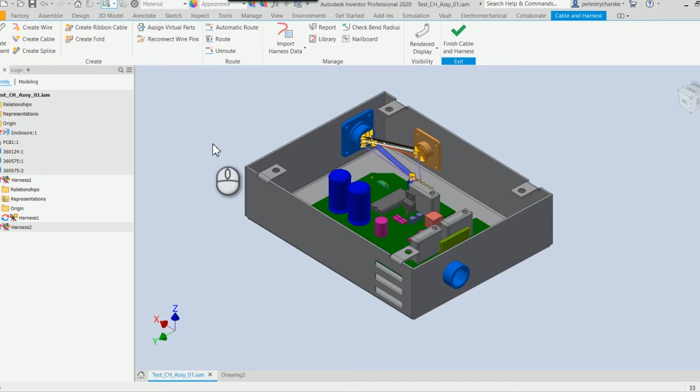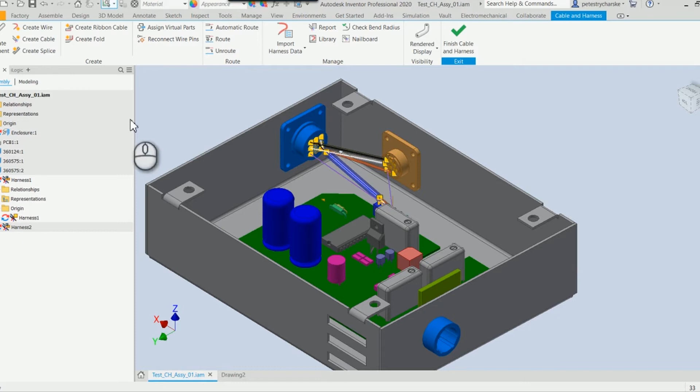But in some of the commentary to that video, a person said, that's awesome, but there's no way to change the color. It's always going to be blue for the segment. And I have good news. It is possible to change it. Part of that requires having different styles that you can choose from your wire library. So I've already activated a harness I had for a different video and created a segment. So here's that beautiful blue segment that everybody is used to seeing and the other person talked about.

But what we can do is, inside the library, we can look at different categories. So this is where you would normally create your own wires. I've created some of my own wires, or I've created my own cable, just some standard 14-2 cable. But you can also create what are called looms, and the looms are the harness itself. So there's the default library loom, that's the one that you normally see. Then if you look at the sample, you've got some other types that you can use. And then I've started building up my own.

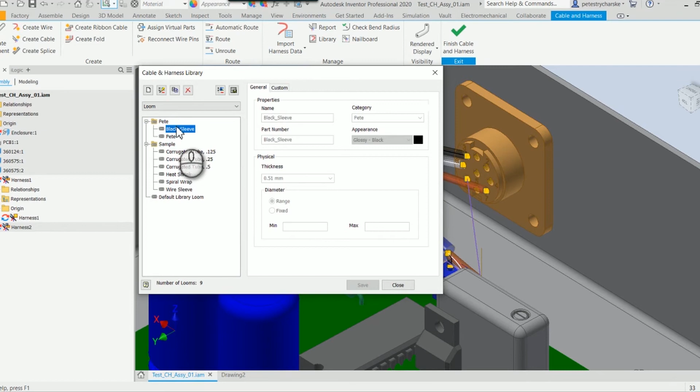So I've got one that looks like stainless. Looks like I've switched that, that's not available. But the black sleeve is one, so I'll have to adjust the material library to get my other stainless thing back. But here's our black sleeve, and you can see I've put it as glossy black.

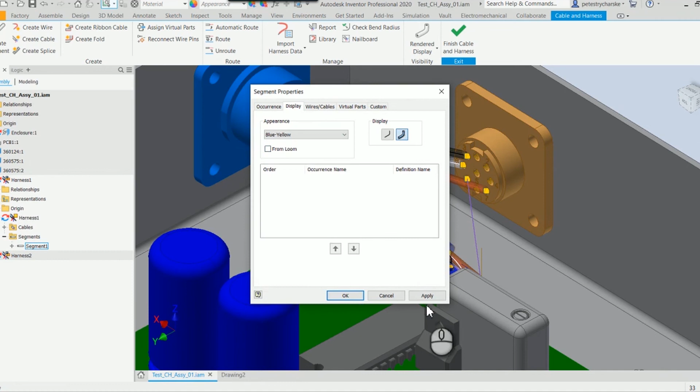So in order to change that, you'd come down to the harness, find the segments, select it, and then if you right click, you can look at segment properties, and sometimes you can change stuff in here. I don't remember if there's a color here. There you go. So you could change the color here to just about anything you want. So blue, yellow, apply it, and you can see it's now got that splotchy look. So that's the one way you can change it.

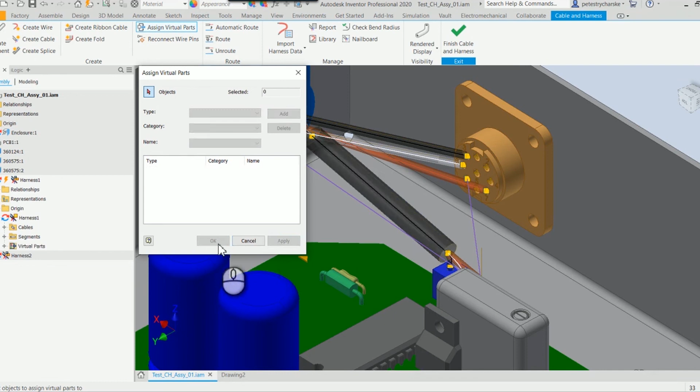But what I typically like to do, because we can actually use this in the bill of materials, is I'm going to apply a virtual part to it. So if we assign a virtual component to the segment, we can say, well, what do you want it to be? We want to grab a loom. Which category? I'll grab the Pete category, and I want to use my sleeve. Hit apply, and now you can see it's my black sleeve.

So just a quick hitting video today, just showing you how you can change those segment colors, or even better, you can assign an actual loom material to it.